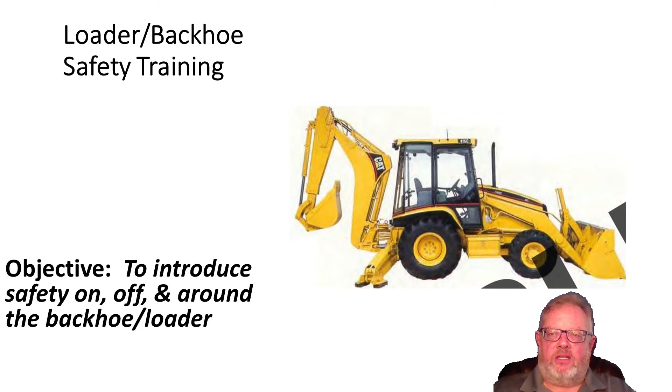As I said before, we're going to talk about safety on and off the backhoe loader, and you might say, well, this is for operators. Well, I can understand that, but the truth of the matter is safety is everyone's responsibility. So remember, if you're on the job site, it's your responsibility to look after yourself as well as your co-workers. So keep that in mind.

We're going to talk some very basic information here. The three basic components of your backhoe, trackhoe, excavator, whatever the heavy piece of equipment could be. We're going to talk about the loader, the actual tractor itself, or the backhoe, and stabilizers. All that stuff is important. The bucket, the backhoe, the stabilizers, the front loader, and the tractor. All that stuff is important.

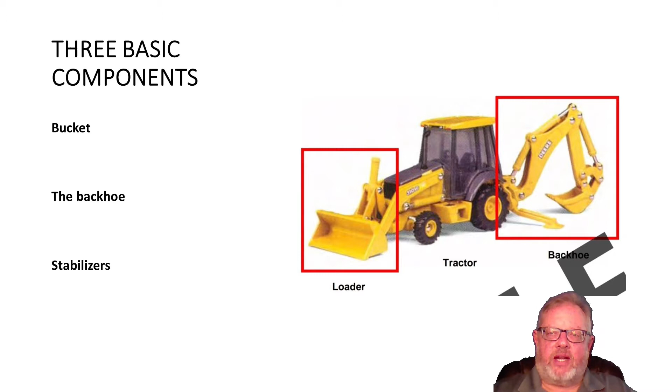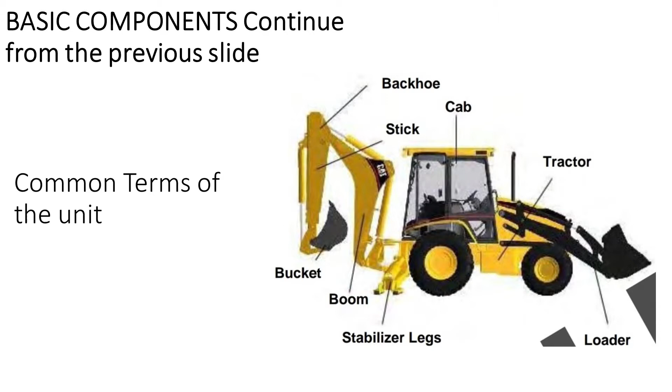We all come from different backgrounds, and there may be someone that doesn't quite know what we're talking about when we discuss these components. So you have the bucket. It's attached to the stick. It's all part of the backhoe attachment. Of course, there's a boom that goes along with the backhoe attachment. You have stabilizer legs or outriggers. You have the cab where the operator sits, the actual tractor, and of course the loader, or sometimes called the front loader. As anyone who operates a fork truck or industrial powered truck, as it's called in the OSHA standards,

we need to have a daily checklist, and it's great if you formalize this list. It gives you some information, it gives you some history for that piece of machine, and that's important that we develop histories for the pieces of machine we operate and make sure we stay on top of any maintenance that's required or that may be unexpected that we can catch in the daily checklist.

As you can see, we want to, of course, check the engine, make sure oil, coolant, hydraulic fluid levels, things like that are adequate. They're in the shape they need to be in. Of course, check for leaks and things like that.

We want to check for broken and or dirty windows, anything that would inhibit the operator seeing the conditions on the job site around them in their field of vision. We want to make sure we check all the levers, all the buttons, make sure that they operate smoothly. Every piece of equipment probably is going to have a little different feel in how you operate the front loader and the backhoe, the stabilizers or outriggers.

Even if they're the same make and model, one may have a few more hours on it than another, and that's going to affect the operation of that piece of equipment. Obviously, you want to check for brakes, got to stop. You want to check hydraulic hoses, even new pieces of equipment. At some point, after so many hours, most hydraulic lines, fittings, tend to have a leak. Any kind of significant leak that you observe, you need to address in some way or another, so keep that in mind. Check all the safety devices, make sure all the guards are in place, make sure they function correctly. All that stuff is important.

Obviously, we want to inspect bolts, welds, pins for proper condition. Make sure that those things are in good shape and operating as they're intended. We want to inspect the ROPS or the rollover protection system, rollover protection structure, however you want to say that, but it is important that the function of that canopy and the rollover protection system works correctly. It, along with your seat belt, can protect the operator if it's unfortunate enough to have some kind of rollover.

Of course, you want to check the tires, inflation, make sure that missing valve caps, stems, that sort of thing, make sure none of that's happening, make sure it's all in place. Inspect the lights, gauges, make sure the horns and the alarms work properly. This is one way you can communicate with people on your job site. So it just stands to reason, make sure that they operate the way they're supposed to. Inspect the engine compartment, make sure it's all good and squared away, ready to go.

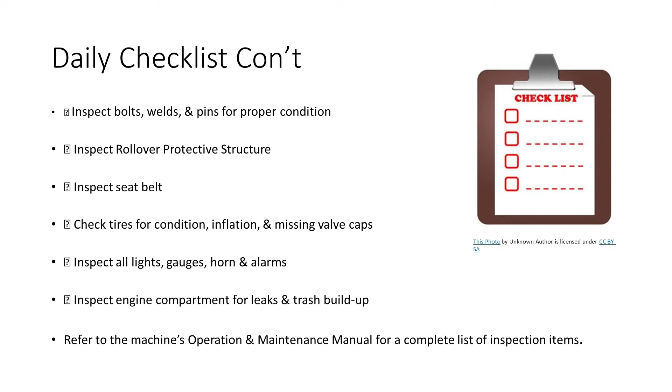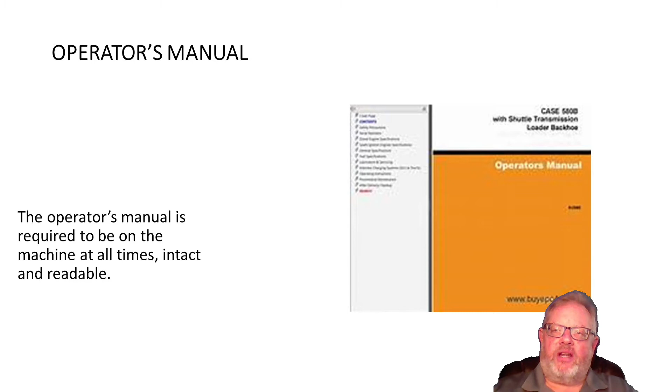And if you need any other kind of information, you want to refer to the operator's manual. It's really important that we make use of this operator's manual, and it needs to be on the machine. It needs to be intact. It needs to be readable. This is going to be our guide when it comes to doing preventative maintenance and safety checks, and making sure our machine is operating the way it was manufactured or intended to operate. All of that is important.

Typical weight of components - I don't think it's quite necessary that you know the exact weight of any of these components, because different models, different pieces of machinery are going to have a little bit different weight totals. Having said that, it is important to realize that the tractor itself is the heaviest part of the system. The backhoe is the second heaviest part of the system. The loader, empty, is the third heaviest part of the system.

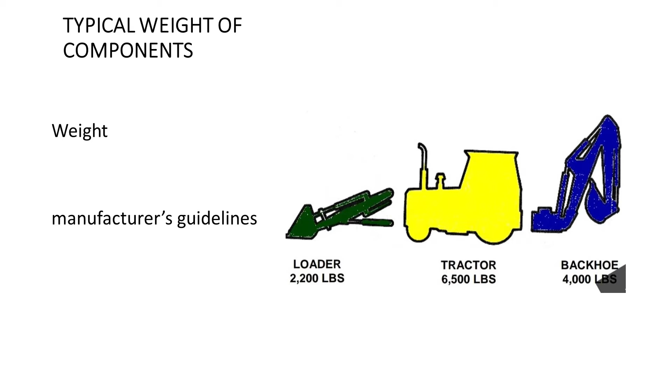Some people, this is very intuitive. They understand this and they can operate a backhoe without thinking about this in great detail. Other people need to be reminded once in a while, or if you're new to a piece of equipment, need to realize that the backhoe is the second heaviest piece of the system, and the empty front loader is the third heaviest. Now, of course, you put stuff in the front loader, aggregate, whatever, you can change how much weight that is, right? So keep that in mind.

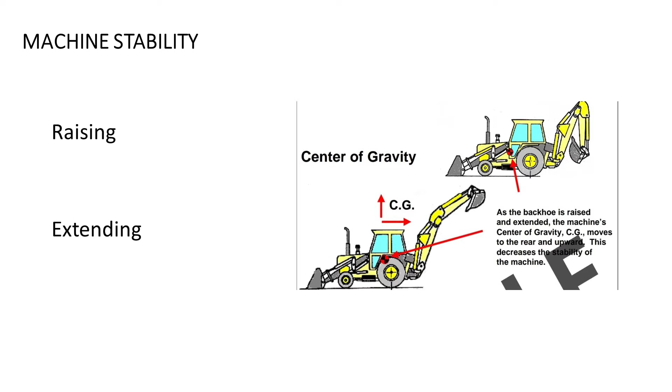What's really important when we talk about these machines is that we talk about the center of gravity. This is true of any piece of heavy equipment. Anything you do with a backhoe, anything you do with the front loader is going to change the stability of the machine. Really what we're talking about is the center of gravity. So when the front loader is down and the backhoe is in its intended position or resting position, you have a relatively neutral position of the center of gravity.

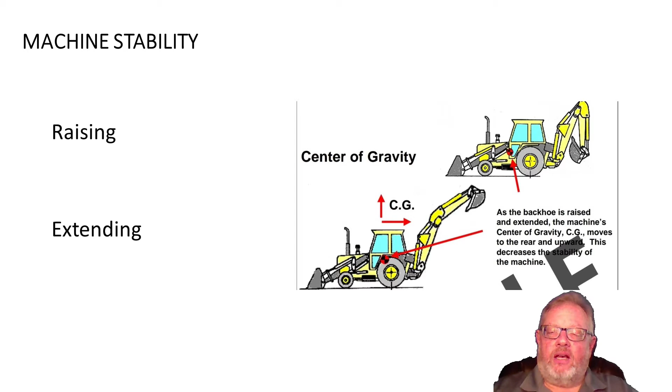As the backhoe is raised and extended, it raises the center of gravity and it shifts the center of gravity from its neutral position towards the backhoe. Now, of course, if you're going to have something in the front loader and you're going to use the loader, you're going to get the same thing there as well.

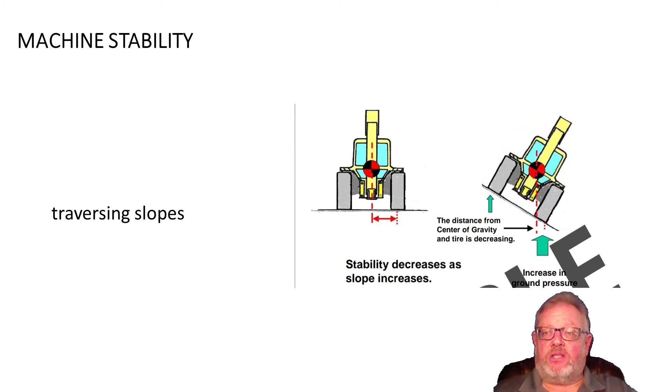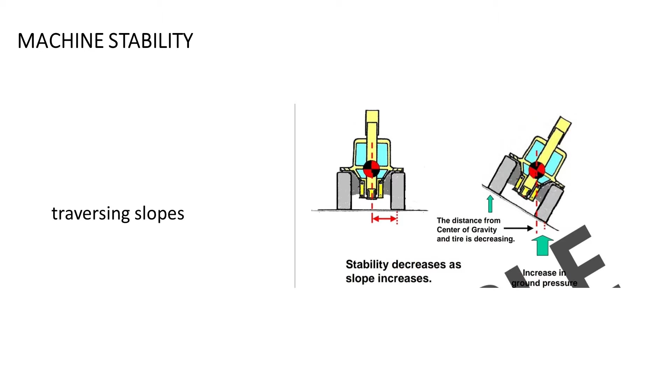We talk about slopes. Stability decreases as the slope increases. This may be really intuitive to some people; to others, it may not be so natural to think of these things. So when you're on a slope relative to the wheel that's going down, or the furthest down on the slope, the center of gravity is raised. This is what makes the tractor, the backhoe, the excavator, whatever piece of heavy equipment you're operating, that's what gives it the potential and the tendency to tip down the slope.

So we want to be aware of that. We want to take that into consideration. If you remember a few slides ago, we talked about the tractor being the heaviest component of the system, the backhoe the second heaviest, and the front loader, empty, the third heaviest. So when you're talking about machine stability, you obviously want to use the flattest path you can take.

Having said that, you can use the weight of the backhoe both in a good type situation or in a bad type situation. If you take the backhoe and extend it and raise it towards the top of the slope or uphill, you can offset some of the tendency for the machine to roll over downhill. Conversely, if you take that backhoe attachment and swing it down the slope, down the hill, you're going to increase the potential for that piece of equipment to turn over. So keep that in mind.

Also, you can use the stabilizer bars, or you can use the outriggers to help with stability. That's really important that we look at those things. If you're a novice or a young operator, someone who hasn't used a piece of equipment or a particular piece of equipment - even if you're an experienced operator, they all are unique in the way that they feel and respond on the controls. So use this information and be very intentional on how you use your pieces of equipment until you get used to them and know your piece of equipment.

Obviously, machine stability can decrease. That's why they have stabilizers. It's why they have outriggers, so that you can help stabilize and keep the vehicle, the piece of equipment, as neutral as possible. And it's really important as you're digging or whatever you're using your backhoe for, the center of gravity is going to change as that part of the equipment changes or moves. And so those stabilizer bars, outriggers, are good parts, good safety devices that should be used and always used.

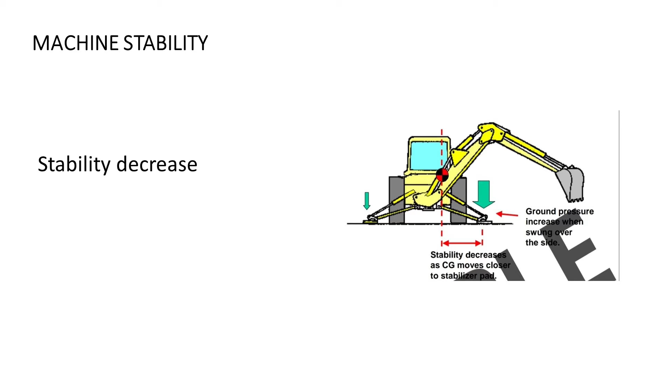And in fact, a lot of modern pieces of equipment have proximity sensors on the stabilizers or the outriggers and will not let you operate certain pieces of equipment until they've been deployed. So that's a nice safety feature and one we want to make use of if your machine has that.

Of course, when you're working and you're not on a flat plane, a flat surface, you might want to make sure that your downhill stabilizer is deployed fully, so that it makes contact with the ground and supports the machine. And you may even need it to raise the tire slightly or take weight off the tires so that you can keep the piece of equipment level.

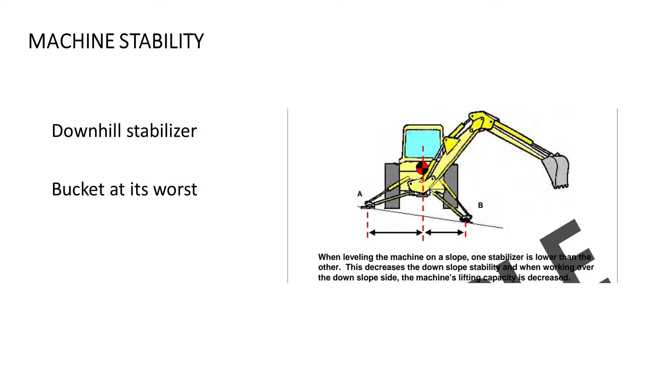And as we talked about before, when the bucket is pointed downhill, being the second heaviest component of the system, what it does is it decreases the stability of the system. Therefore, the stabilizers, the outriggers, nice safety feature to keep your piece of equipment level and keep it stable so that you can do your job effectively, right?

So we've talked an awful lot about the backhoe part of the system, and sometimes we avoid talking about the loader, or what some people call the front loader. But as you gather material, whatever that material may be, and you put it in the front loader and you go to, say, put it in the back of a dump truck or whatever it is you happen to be doing, that is going to decrease the stability of that piece of equipment, that backhoe or that track hoe.

Of course, the higher you raise that loader, the higher the center of gravity is going to go for the system. And so if you raise that front loader to dump aggregate and you're on a slope, you're really in a bad situation, and you really never want to load something with a front loader on a slope. It can really put you in a bad situation, quickly. So we don't want to do that, right?

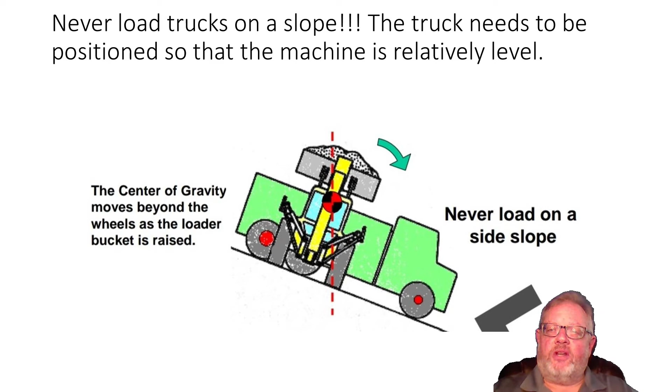So, driver responsibilities. The driver, of course, is responsible for themselves. They are responsible for the machine they're operating, the people that are around them, and also property. And I will add a fourth to this list: citizens, concerned citizens, the public.

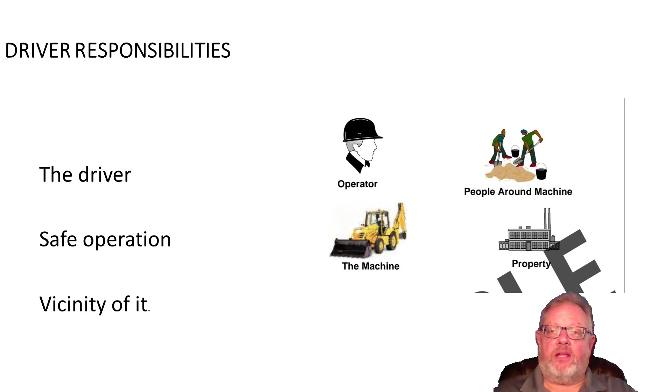As most of you know that have had any experience in utilities, citizens tend to really be interested in the work you're doing. There's a lot of them that just like to ask questions. They feel like they're getting some kind of inside knowledge, or maybe they just really enjoy knowing what's going on. So you're responsible for all these people, the machine, the property, as well as yourself. So keep that in mind.

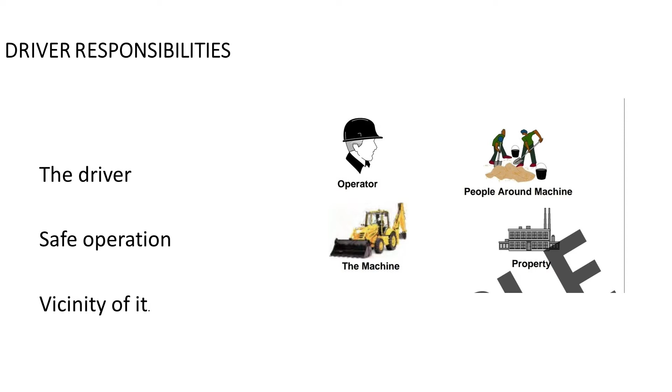That's also why I say safety is not just one person's responsibility, it's everyone's responsibility. The people working around the machine should also take responsibility for the operator and help keep the public off the job site. So keep that in mind.

So some things that can affect our awareness when we're operating these machines, or when we're around these machines, are fatigue and hunger. In utility work, it's not uncommon to work extended hours due to line breaks, inclement weather, things like that. And so you start working long hours, you start going without food or some kind of snack, something to keep your energy up. It can absolutely affect your awareness.

Weather, heat and cold, straightforward kind of stuff. In the dead of winter when it's freezing outside and you're having to deal with the cold weather, it's something you have to mentally be strong and overcome. Same thing in the dead of summer when in Tennessee we have 90 plus degrees and 85, 90 plus relative humidity. And you've got to stay hydrated, but it really takes a while to get used to that kind of heat and that kind of humidity and let your body become acclimated to it.

And in that time frame of acclimation, of course, you have to worry about being dehydrated, and the heat and the humidity just saps out your awareness. So you got to keep track of that.

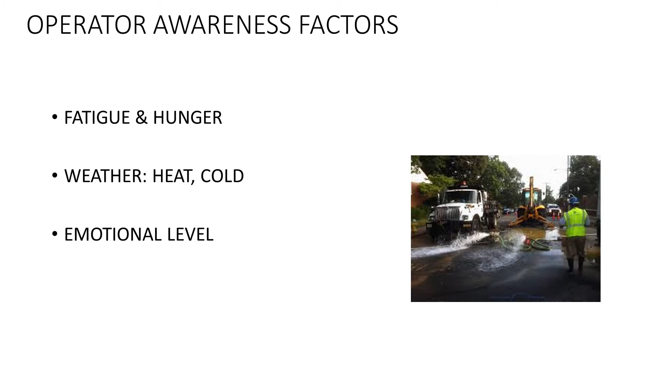Some other things that can happen that can affect operator awareness is physical health. Someone may be a diabetic, somebody may have high blood pressure or low blood pressure, they may have some other condition that makes it important for us to pay attention to what's going on with them, make sure that they have the appropriate sugar levels, make sure that they take their heart medicine, things like that.

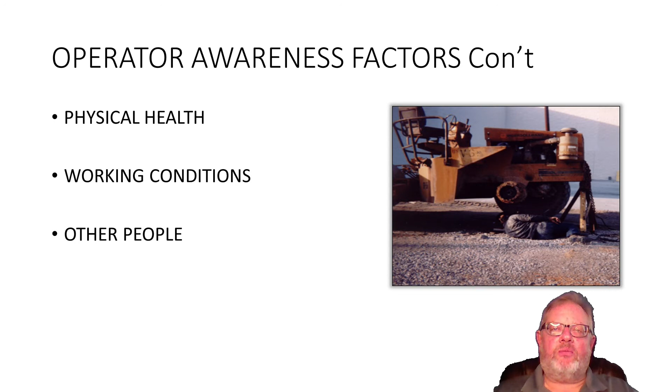We've already mentioned some working conditions, but any working condition can cause awareness to wane, and so we want to make sure we pay attention to that. People, I've already spoke about concerned citizens, but the public, like I said, they find utility work interesting, and some of them want to come up and know as much as they can know, and some of them just like to offer their opinions on life in general. And at any rate, these people can interrupt our flow of work and be irritating.

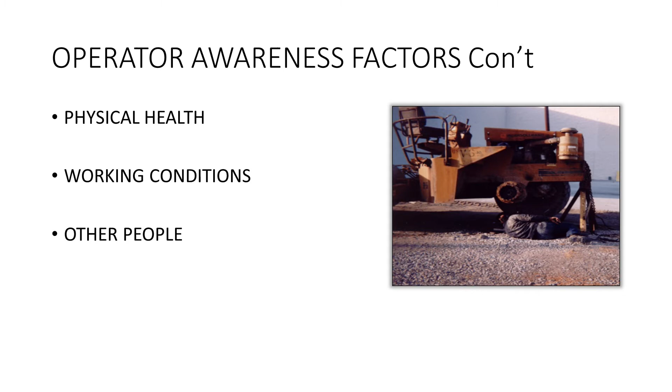It's important to know you are, in many cases, the face of your utility. You have to be professional. You have to be polite, but you also have to stand your ground and make sure they don't enter the job site and put themselves or someone else at risk when it comes to safety and health. So for safe operations, we don't want to take anything for granted. We'll make sure we keep in line with our company policies.

When we get into the machine, we want to face the machine when we're climbing on and off. We want to keep the machine clean. Along with keeping the machine clean, we want to make sure our shoes are clean. Avoid loose clothing and jewelry. I cannot tell you how many times I've been involved in accident and fatality investigations where loose clothing and jewelry were the culprits in someone being pulled into a machine or amputations of fingers. So we want to avoid those kinds of situations if we can.

Be particularly aware of loose clothing and jewelry. Make sure you keep that stuff in check. Don't allow it around heavy equipment or any kind of equipment with moving parts. Wear your PPE. Make sure that it's available. Make sure it's clean. Make sure it's adequate. Make sure it's ANSI certified. All those good things. Never operate the machine without the protective guards in place.

Always check the height, width, and weight restrictions of your particular piece of equipment that you're putting in service. Keep all your safety devices in place and in working order. A lot of these machines have proximity sensors and other type sensors that require certain things to be done in certain order before they can be operated safely. Do not bypass those proximity sensors. Make sure that they are in place and they're working correctly.

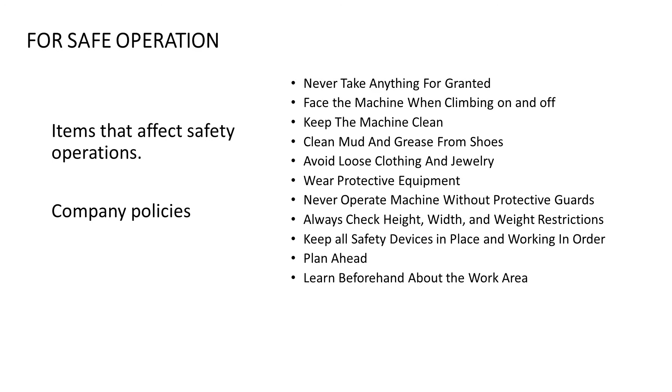So do not bypass your job briefings. Make sure you do those. Make sure you do them well. If you've got concerns, step up to the plate and make your concerns known. Learn beforehand about the work area, anything in particular that you're going to need to know, need to do, need to address before you start at your job site, and make sure, just along with the job briefings, those things that need to be addressed are addressed.

Seat belts. Now, I know a lot of people dislike seat belts. Okay, I understand that. They are restrictive and all those things. They are an incredibly important piece of safety equipment when we're talking about operator safety in backhoes, trackhoes, and heavy equipment. There's a lot of people that have an idealized version of their athletic ability, I'll say it that way, and they think the seatbelt can restrict them from coming out of the machine.

If the machine tips or rolls over, I don't know of anyone that has the athletic ability to avoid being crushed or pinned by a rolling backhoe or trackhoe because they can move and jump and clear the machine. That's just not a very good plan, and it's not a realistic view of most people's athletic abilities. So I say that to say this. Make sure the seat belt's in good working order. Make sure the material is right, it's not frayed. Make sure the buckle works, latches like it's supposed to.

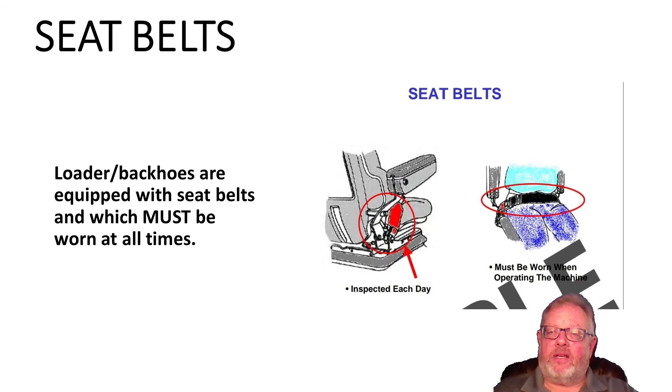Most accidents that occur are due to inadequate rollover protection systems or structures and people not wearing their seat belts. Look, if you wear your seatbelt, you may have some kind of bruise. You may be bruised a little bit, but you'll be alive, and odds are, the statistics show, you will walk away from that accident. That's true for vehicles, over-the-road vehicles, as well as heavy equipment we use on job sites.

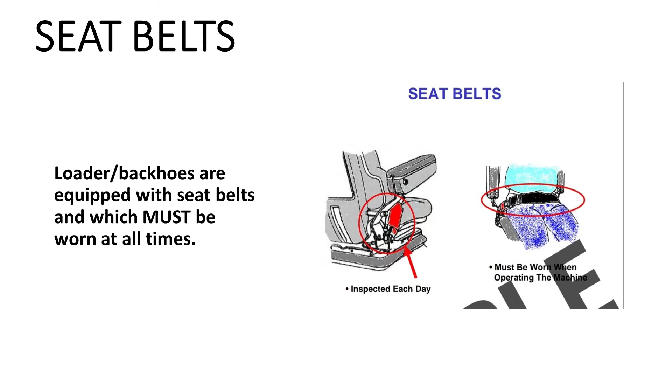When you're climbing on and off the machine, use 3 points of contact. Don't try to climb over the rear of it. When you dismount, do the same thing in reverse. Always face the machine, 2 hands, foot, mount. When you dismount, the same thing in reverse order.

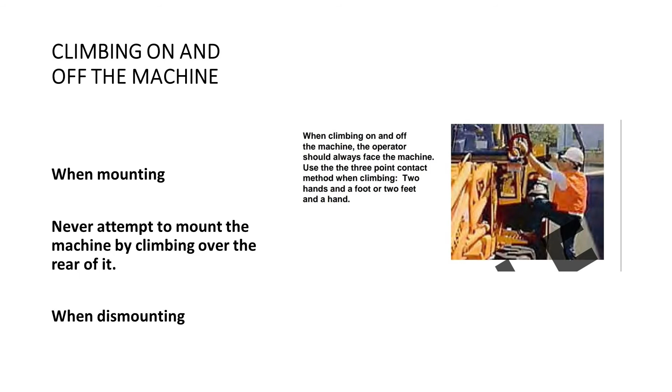Job site safety. As I have said at least a couple of times in this presentation, the job site's everyone's responsibility. It's not just the operator of the heavy piece of equipment. The people on the ground are just as responsible for safety. And so we've got to work together. In this particular case, you are your brother's keeper, your co-worker's keeper.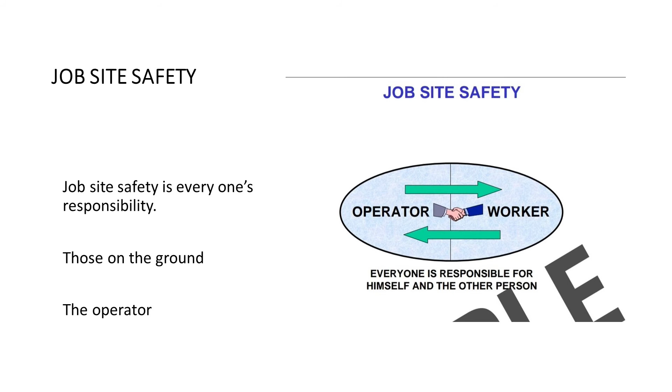It is important that you respect your responsibility to maintain your own safety, as well as respect your responsibility to maintain the safety of an operator of a piece of heavy equipment, the other people on the job site, and the public. It's really important that we take that responsibility seriously. It really is a serious thing.

Because of that, there are certain areas that are danger areas when we're talking about operating equipment, especially equipment that has loaders, backhoes, or any other kind of moving parts to it. Those things, as well as cranes, create some really dangerous situations when the backhoe attachment, for example, swings. And so we want to be careful that if we're on foot, the operator sees us, acknowledges us, knows where we're going to be, what our intentions are, whether that takes place through a radio or through hand signals. Effective communication must take place.

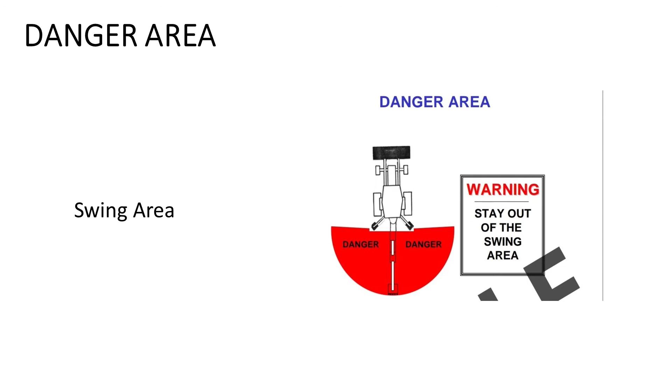Your head, your body is not going to withstand being hit by a bucket. So keep that in mind. We want to maintain safety, and it's everyone's responsibility. It's the operator's responsibility so that you do not come in contact with that piece of machinery. It's also your responsibility to address the operator in such a way that that operator knows where you're at. That's important. So anytime you enter the swing zone, like we've said before, make eye contact.

Whether you use hand signals, verbal with a radio, or you actually yell so that the operator can hear you, doesn't matter. You have to have effective communication so that the operator knows what your intentions are, where you're at, and what you're going to do. Don't make assumptions. The operator cannot make assumptions. The person that's on the job site cannot make assumptions either.

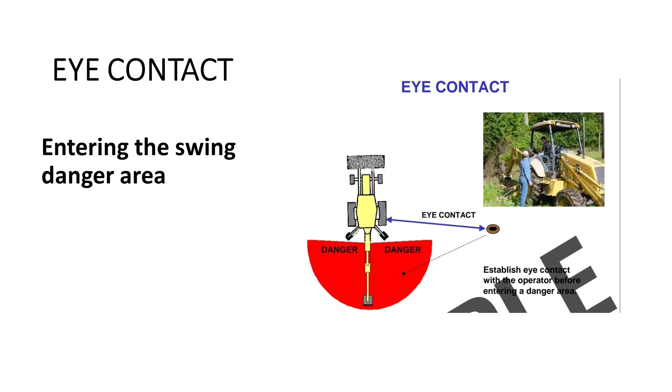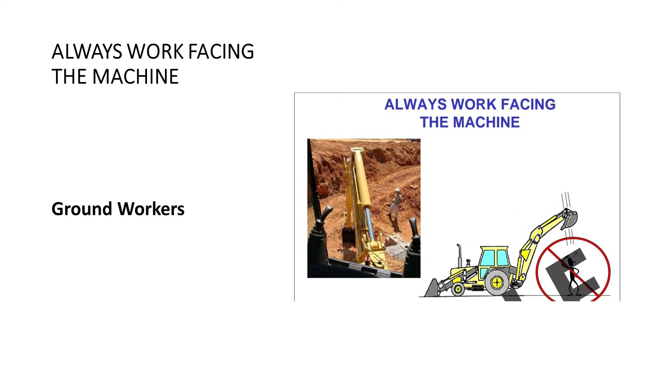Effective communication. This is an issue that needs to take place in the job briefing. People need to understand these things. They need to be repeated often. We cannot lose sight of this. This is how people get hurt and killed. The operator should always be able to see the ground workers. You shouldn't sneak up behind an operator, and you should face the machine when you approach it. Make sure people can see your face and any kind of information you're trying to give them.

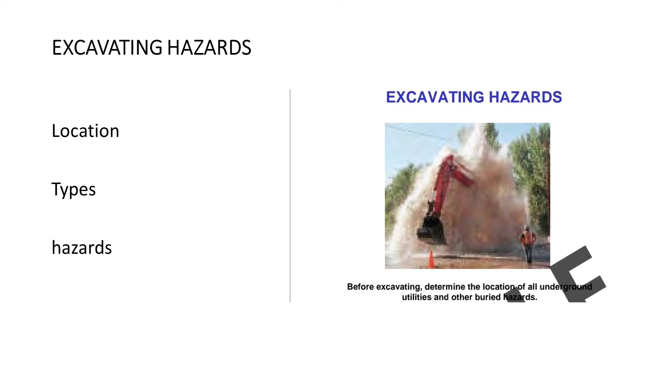Excavating hazards. I don't need to go into calling 811 with utility workers in any great degree. You all know underground utilities, it's important that we do not disturb them. We need to know their location. We need to know if it's water, wastewater, electrical, or something else along those lines. We need to know the hazards that are involved with those underground utilities. So make sure that that's well understood. Make sure everybody has a good idea of the location, and if hand digging needs to take place at a certain point, that needs to be discussed and done.

The stabilizers can cause cave-ins, right? We've talked about this in trenching and excavation class. One of the reasons that the spoil pile needs to be 2 feet away from the edge of any excavation and trench is because of the weight that it places on that side of the trench wall, and it can cause a cave-in. It is the same thing with the tires, the tracks, or the stabilizer outriggers of a backhoe, track hoe, or other piece of heavy equipment.

When you place weight and stress on the face of the excavation wall or the trench wall, you're creating a situation where you can have a cave-in. The only thing worse than the cave-in is that you have the cave-in and it destabilizes that piece of equipment such that it goes in after the cave-in.

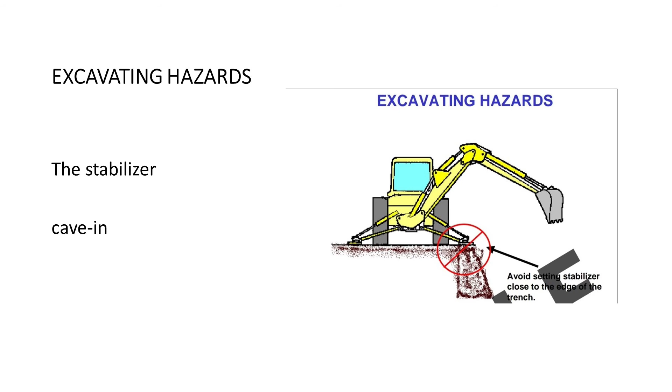So we want to avoid all those kinds of situations if we can. Lifting loads with a backhoe.

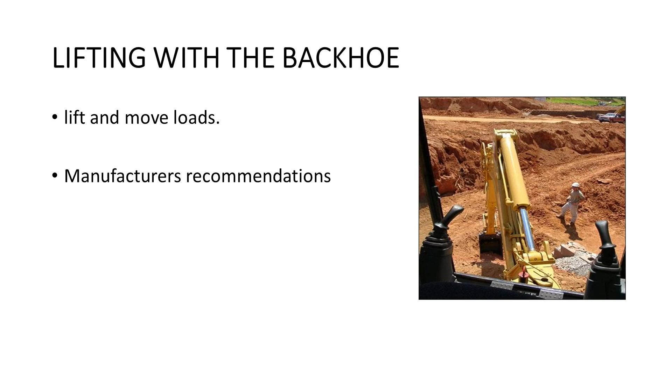If you're going to lift and move loads, follow the manufacturer's recommendations, the operator's manual, what the limits are. It's important to note, just like any piece of equipment, when you pick up weight with the backhoe extended, the load limit is reduced as to what that piece of machinery can pick up. So keep those things in mind. Make sure you use the operator's manual and make sure you do what the equipment is capable of and not any more.

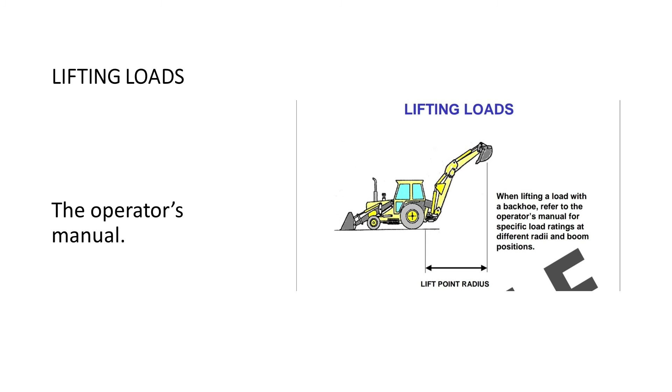That's important. So, controlling worksite access. Before the excavating work begins, you want to limit unauthorized persons. We've mentioned this before - not everyone in the public, but a lot of people are interested in what's going on, especially with utility work. You may need to put up barriers or use caution tape. People directing traffic and taking part in traffic control need to help and be a part of this process as well. So it's everyone's responsibility, but usually it's difficult for the operator of a piece of heavy equipment to affect that like someone can on the ground. So keep those things in mind.

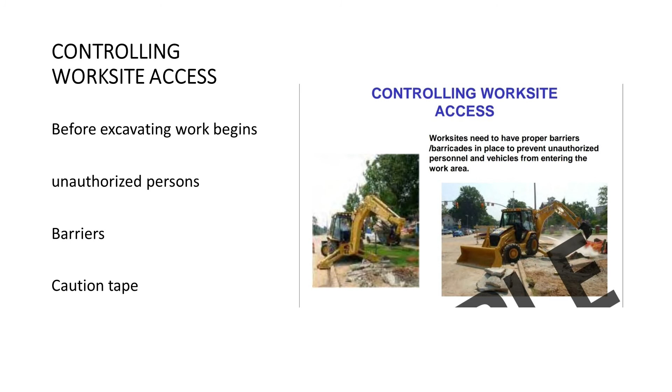Transporting the machine. Preparing it to transport, locking the pins so that backhoes do not swing, that sort of stuff. Make sure that the front loader is down where it's supposed to be. Accelerate slowly. Tie down machines. Being able to foot everything correctly is important.

We've talked about this in the past. It's really important that you use chains appropriate for the piece of equipment and its weight, that they are clearly marked according to DOT regulations. Our goal is to keep that piece of heavy equipment from moving forwards, backwards, or side to side. Because of that, it's important that these chains be in good shape, rated for what we're using, and set at 45-degree angles. If you use anything less or more than 45 degrees, you're going to limit the effectiveness of that chain to keep the equipment from shifting.

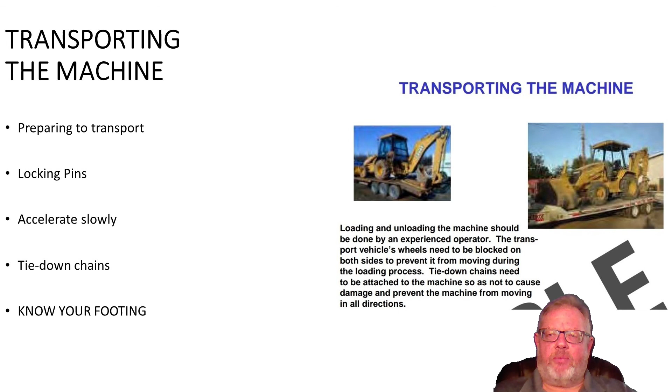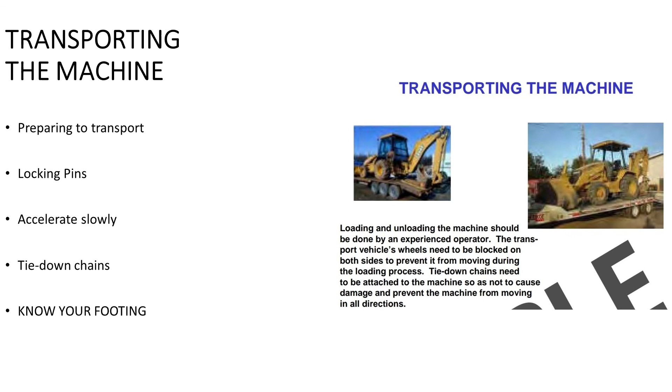It really does not matter how far you are traveling. If that trailer and piece of heavy equipment go on a public road, you're responsible for it. So make sure your chains are appropriately marked, make sure the equipment is positioned correctly, and make sure you use 45 degrees on chains that DOT looks for, with proper markings. Make sure none of the links are torn up, and if you're using straps, make sure they're in good shape. All that stuff is important. If you need more information, there's information out there in the DOT regulations that spell that stuff out.

So driving the backhoe to the job site - once again, seat belt control. We want to keep this stuff from bouncing around. We want to pay attention and look out for the public. We want to make sure we make it to the job site safely, and that we don't tear down any power lines or telecommunication lines on the way.

One of the things that's important once the piece of equipment is offloaded is that the operator and those on the job site realize where the power lines are, and that you do not violate the minimum approach distance, which in most cases is 10 feet when dealing with distribution lines. Make sure you know how much power is on those lines. If you need additional distance beyond the 10 feet for the minimum approach distance, make sure you take care of that. If you need a spotter, you need a spotter.